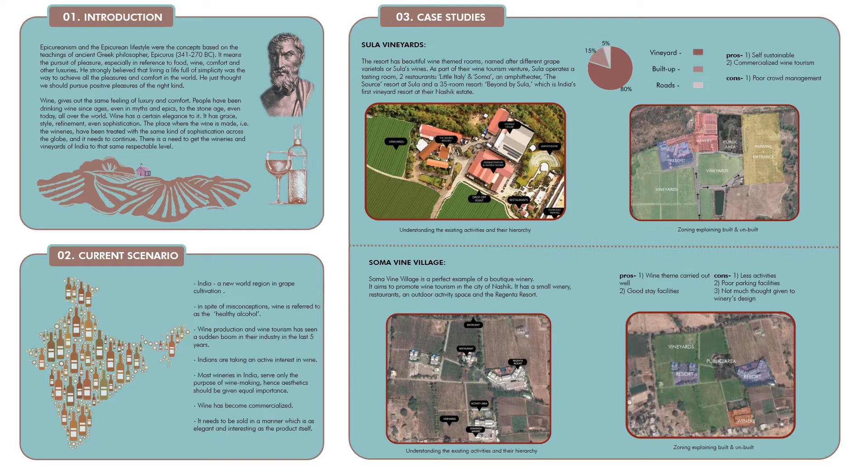A few live case studies and online case studies were done, one being Sula Vineyards, a large scale winery almost like a wine park, and the other Soma Vine Village, a smaller boutique winery. These case studies were done to understand the spaces, zoning, circulation, footfall, requirements, pros and cons.

Site selection: out of the major grape growing states in India, Maharashtra was selected, being the leading producer. The site chosen is in Sangli, at plot 50 to 59 of MIDC Palus, an already existing non-functioning winery called Krishna Wine Park.

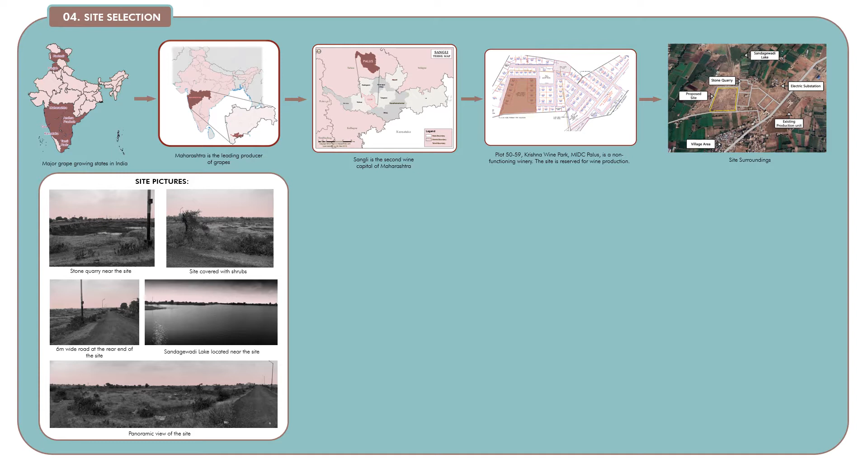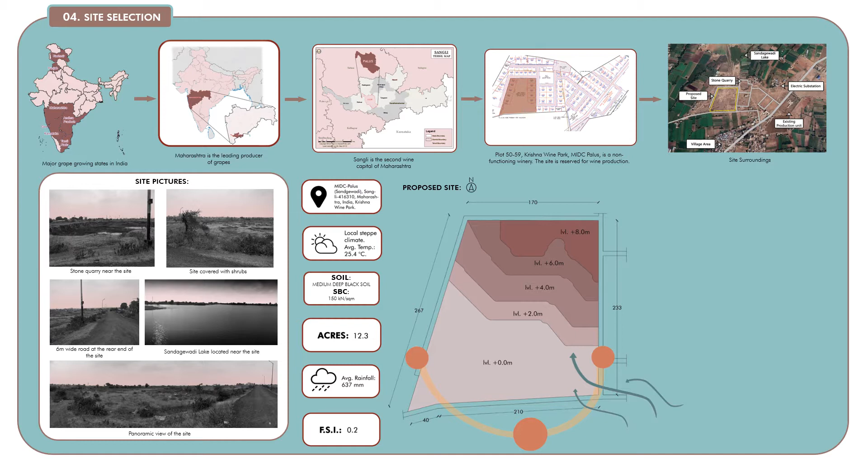These are the site surroundings, including a stone quarry, village area, existing production unit, an electrical substation, and the beautiful Sandagewadi Lake. The site chosen is 12.3 acres of land with climate ideal for growing good quality grapes. It is covered with small shrubs and bushes and has a gentle slope rising from 0 meters to 8 meters. The FSI is 0.2, giving an opportunity to create interesting open spaces and vineyards.

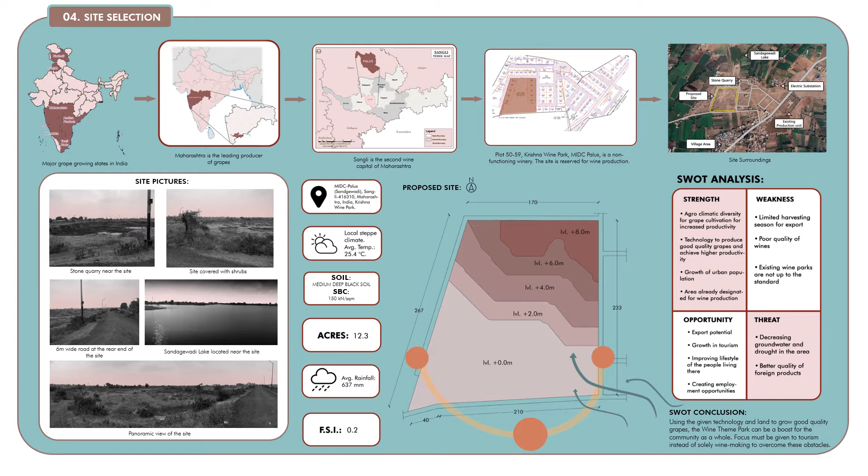The program was divided on the basis of usage of spaces by staff and visitors, where industrial facilities, that is the winery, would be a common factor.

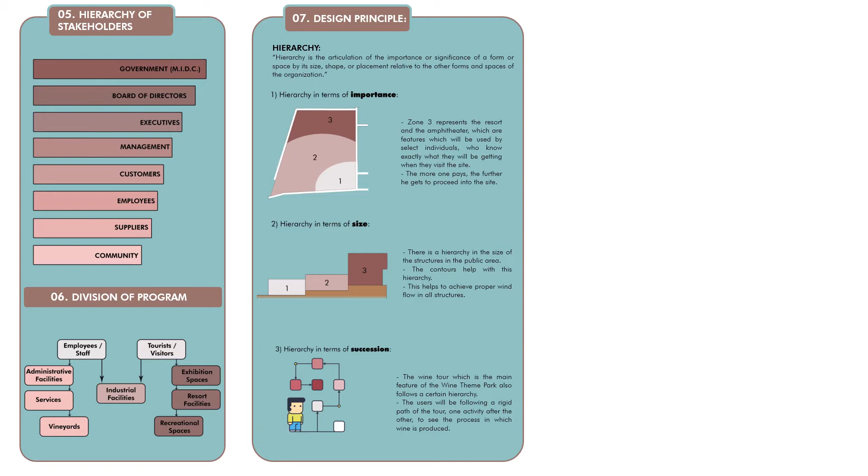The design principle selected was hierarchy, in terms of importance. In the chart showing numbers 1 to 3, 1 represents the public areas and 3 represents the resort part — the more one pays, the further they proceed into the site. There is hierarchy in the size of structures in the public area, helped by the contours, and also hierarchy in terms of succession in the wine tour, which is a rigid process, one stop after the other, showing tourists the process of winemaking.

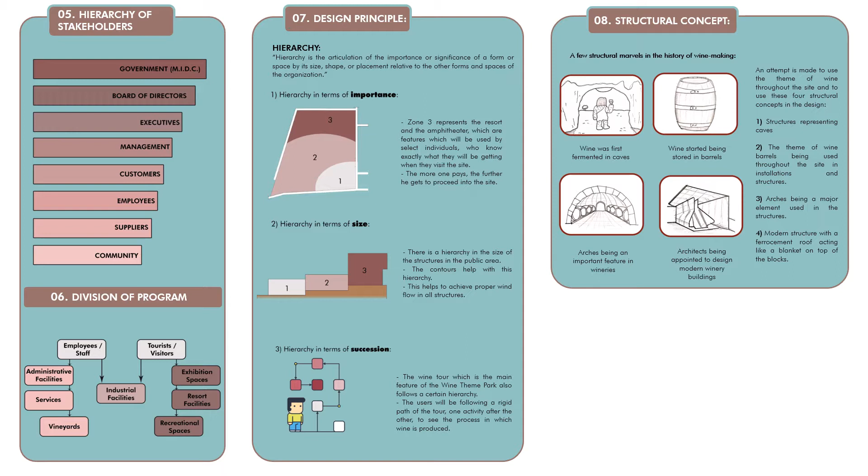The structural concept was inspired by a few structural marvels in the history of winemaking. There are structures representing caves, and the theme of wine barrels is carried forward in the site. Arches are an important element in the design, and finally the ferrocement roof of the structures represents these themes while also having a modern outlook.

How is this theme park different from a normal winery? There will be a focus on the tourism side of things. Instead of a guide explaining and showing the winemaking process in a monotonous manner, there will be an attempt to make this process more hands-on, interactive and interesting.

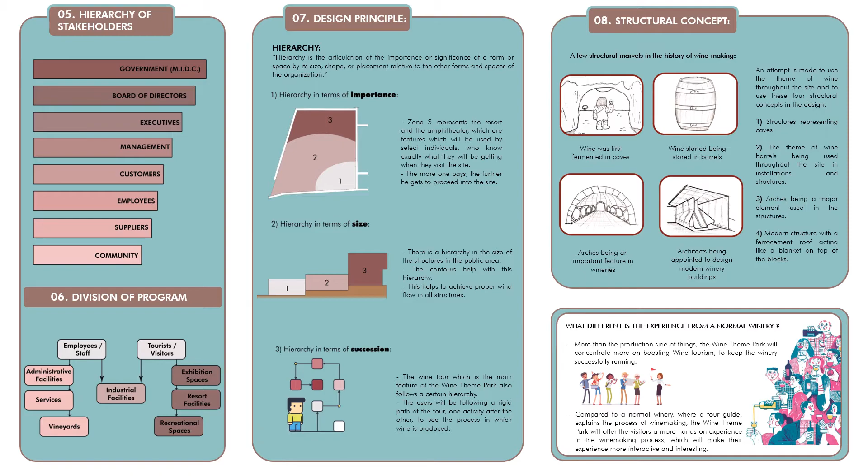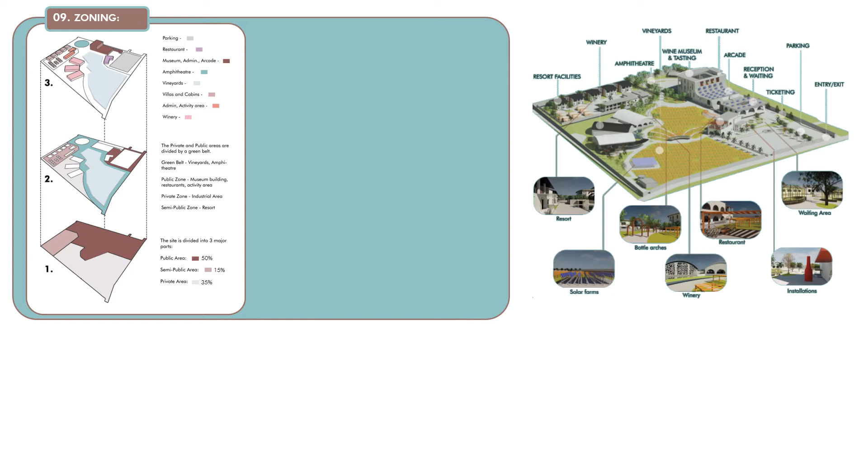The site was divided into 3 major parts: the public area, private area, and semi-public area. These areas are divided by a diagonal axis throughout the site, which is the green belt, comprising open spaces like the amphitheatre and the vineyards.

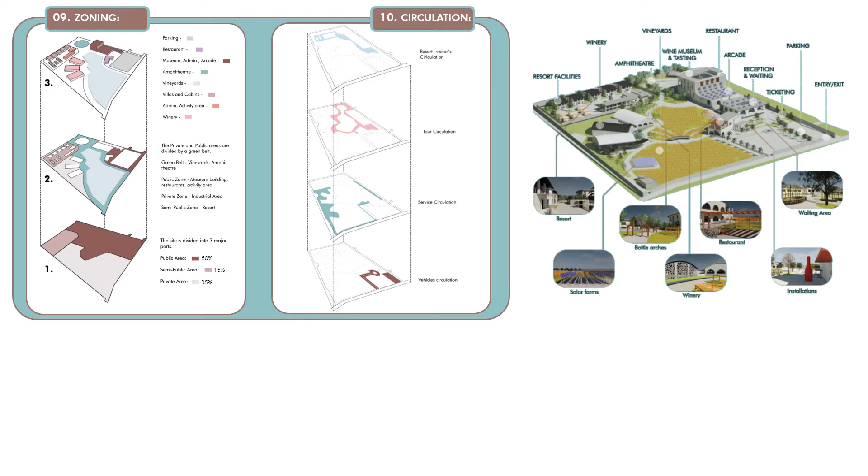Circulation: vehicular circulation was restricted to the entry of the site, and service circulation was restricted to the edges. People opting to stay at the resort will have a free flow of circulation, and finally the wine tour has a rigid circulation, which will be talked about next.

This is how the site was developed, starting with the main entry points and service entries being decided. Next, the open spaces in the green belts were planned out, then more recreational spaces were added to the site. Next, a production unit was created near the vineyards and the service areas, and finally a resort was designed at the end of the site with a view of the lake.

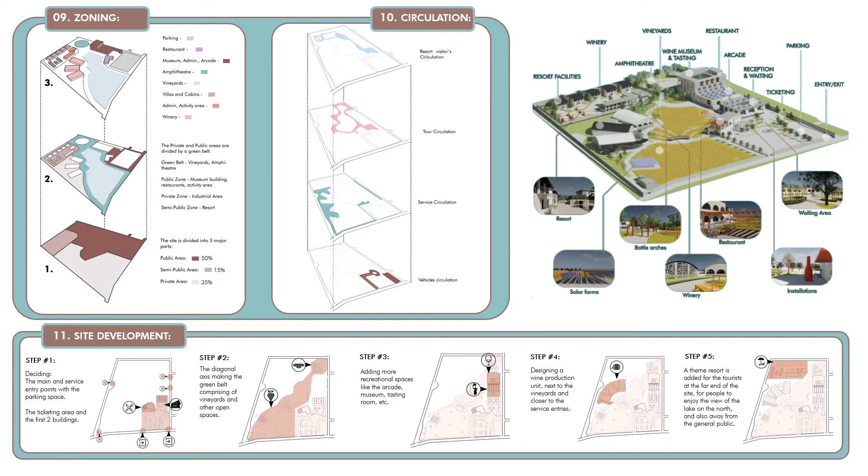This is the site plan. These are the main entry points and parking areas for the 4-wheelers, 2-wheelers and the buses and shuttles, which will take the people to the main city approximately an hour away.

These are the service entries on the left and right side. As you enter from this main gate, you will see the ticketing and waiting areas along with the restaurant building, gift shop and reception area.

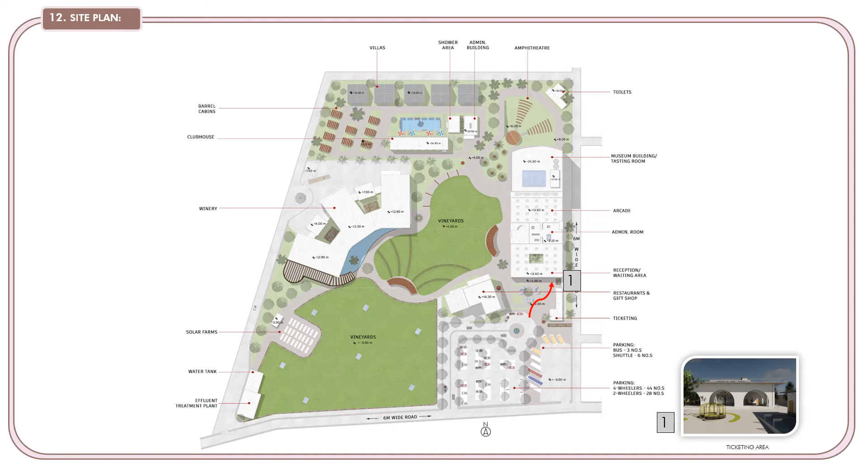After purchasing the ticket to the theme park, one can utilize it for any activity, being the restaurant, the tour or the arcade. People going to the resort will be guided to the electric cycle and caddy stand, from where they will be taken to the resort.

This is the part of the main building where the wine tour starts with the screening room. People can opt for 3 kinds of tours: the regular tour, which will be on foot; a personal tour where they will be taken on personal caddies from place to place, which older people can opt for; or a non-guided free roam tour where they can either walk or take the cycles from place to place according to their convenience.

These are the points where the cycles and caddies will be parked. After the screening room, they will be taken to the vineyards where people pick their own grapes in their respective baskets, making this process more interactive.

They will be allowed into these vineyards, whereas the other vineyards are solely for production purposes, which the tourists cannot visit. Next, they go on to the destemming and grape crushing area where they destem the grapes that they've picked. There will be pre-destemmed grapes already kept in the stomping units for them to crush.

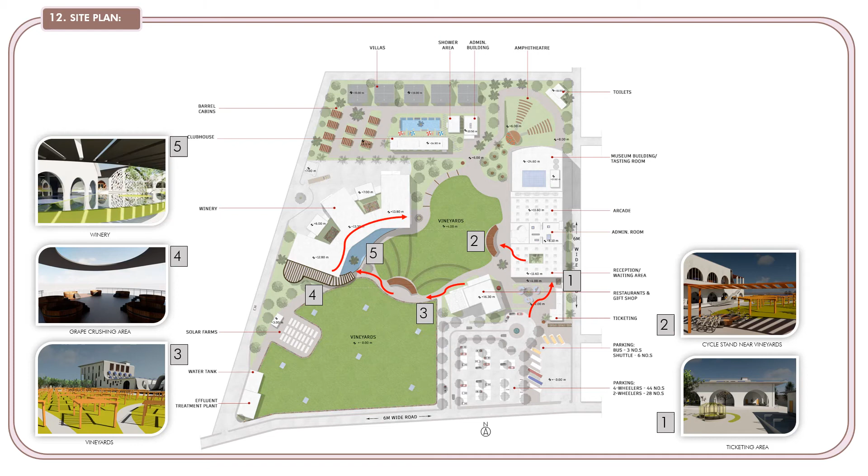Then they take a hands-on tour of the winery consisting of the production unit, barrel storage room, and labeling and bottling unit. Through the landscape features, they make their way around the amphitheater to the final step of the tour, which is the wine museum and tasting area.

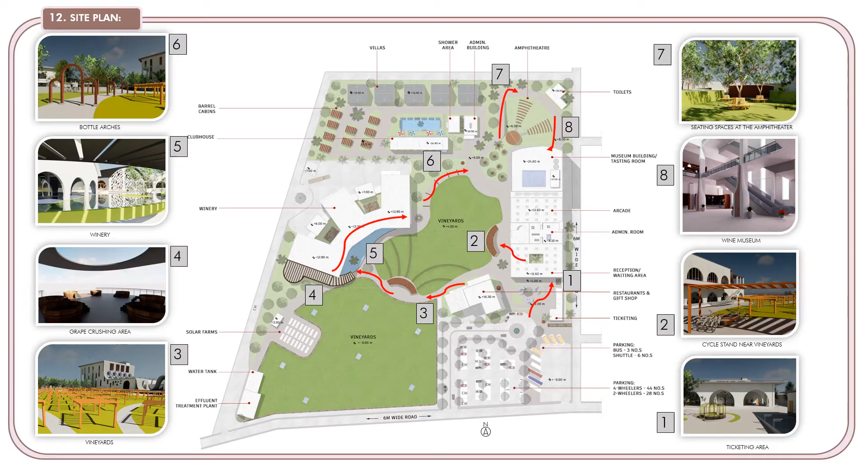These plans show the structures at the entrance of the site. After being dropped off, people will enter the site and see the ticketing counter along with the collection office. This is the front elevation of the ticketing area.

These are the outdoor waiting areas made of polycarbonate sheets. Trees are placed next to them which provide adequate shade. The gift shop is placed at the entrance so that people can visit it while entering the site or while leaving after they are done with the tour.

It has a mezzanine floor as seen in the first floor plan and provides different items like wines, other themed souvenirs or recycled wine byproducts.

The cafe on the ground floor has a bar and a kitchen. It is relatively open, providing ample air circulation, and the interiors follow a theme of wine barrels.

On the first floor, overlooking the vineyards, there is an outdoor seating area which is shaded by creepers and a pergola. Going through the ferrocement roof, there is an air-conditioned restaurant which also follows the theme of wine barrels and has smaller wine installations as well.

Here is the front elevation of the building with an installation on its left. Arches are a prominent feature in most structures in this winery. As you can see, open arches are followed on the ground floor and tinted glass arches are used for the first floor. And this is section B, which cuts through the gift shop and the restaurant building.

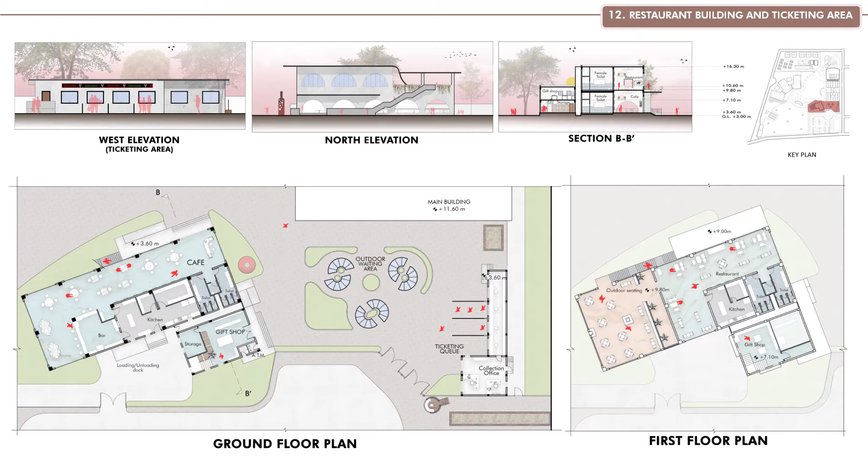These are the views showing the ticketing and the waiting areas, the ground floor of the gift shop, the cafe and the bar on the ground floor, the outdoor seating area on the first floor, and finally, the air-conditioned restaurant on the first floor with different installations.

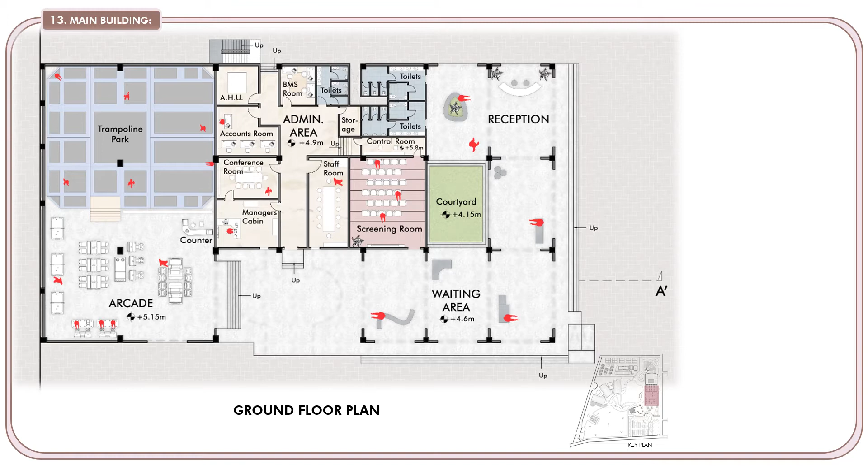Here is the part of the main building which the people can visit as they enter the site. There is an open reception and indoor waiting area for the visitors divided by concrete arches inspired from the Tama Art University by Toyo Ito. It has a courtyard and randomly shaped installations which can also be used as seating spaces.

Next to it is the screening room where the wine tour starts. Here the visitors will get a brief history of wine. Beside it is an admin block consisting of the manager's cabin, conference room, staff room, AHU, accounts room, BMS room, storage area and a control room for the screening area.

Through the roof enveloping these structures, people can go to the arcade block which has different arcade games and a trampoline park, which is mainly provided for the children that don't wish to go for the tour.

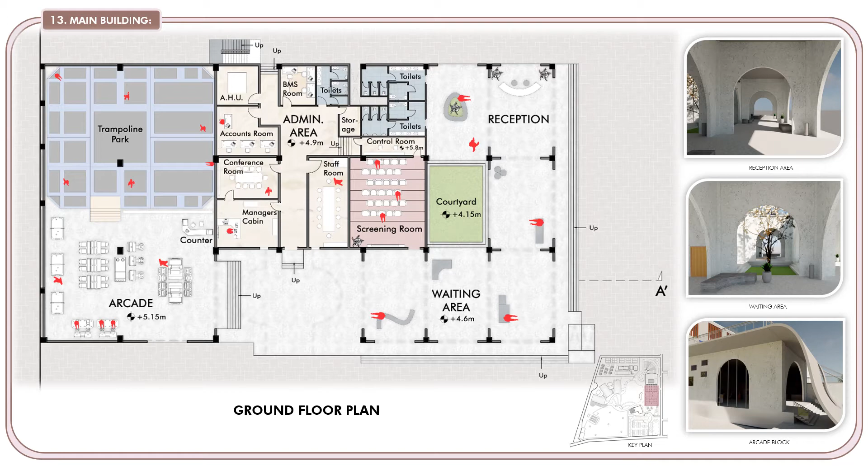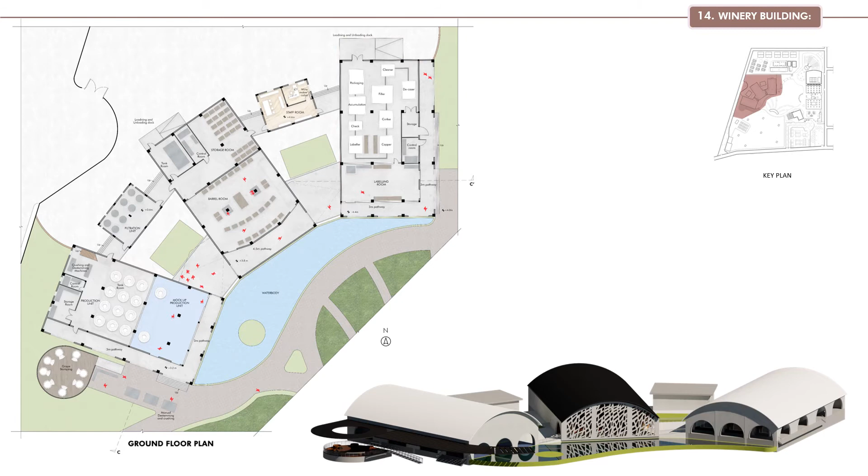These are the exterior views of the winery.

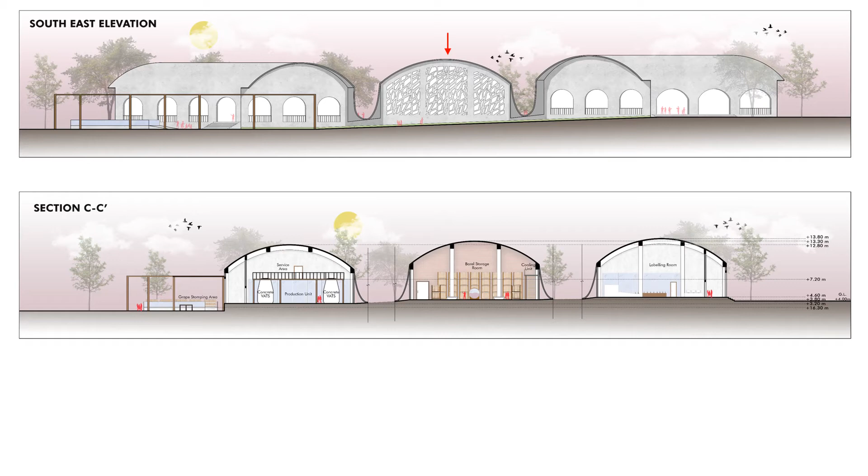The sectional views show the interiors of these three units step by step: the grape crushing or stomping area, the production unit with the vats and service area on top, the barrel storage room with minimal or dim lighting and adequate cooling for the aging process, and a huge wine barrel in the center, an exhibition piece with its side made of glass so people can see the wine inside. And finally, the labeling room.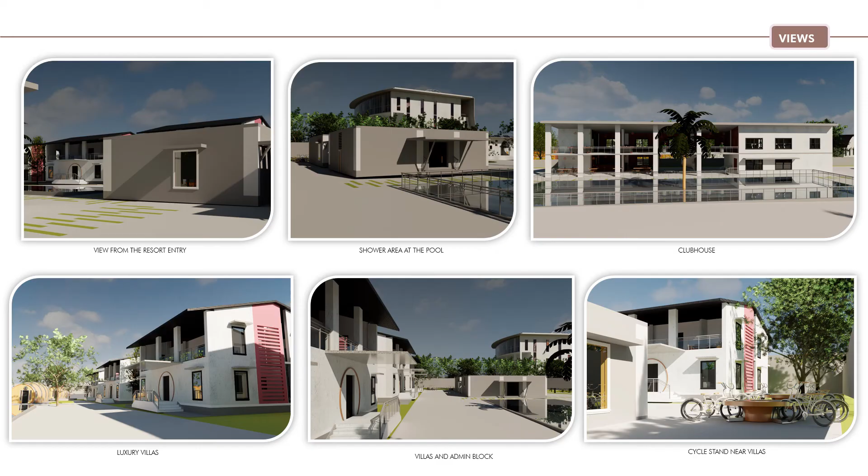These are a few views of the resort, showing areas like the view of the admin block from the entry, the shower area at the pool side, and the clubhouse. Then there are different views of the cabins and the villas with the cycle stand near them.

Now, moving on to the area part. Due to the FSI being 0.2 for all secondary activities, from the available 9,955 square meters, 9,650 square meters was consumed. The total FSI consumed, including the production unit, was 12,285 square meters.

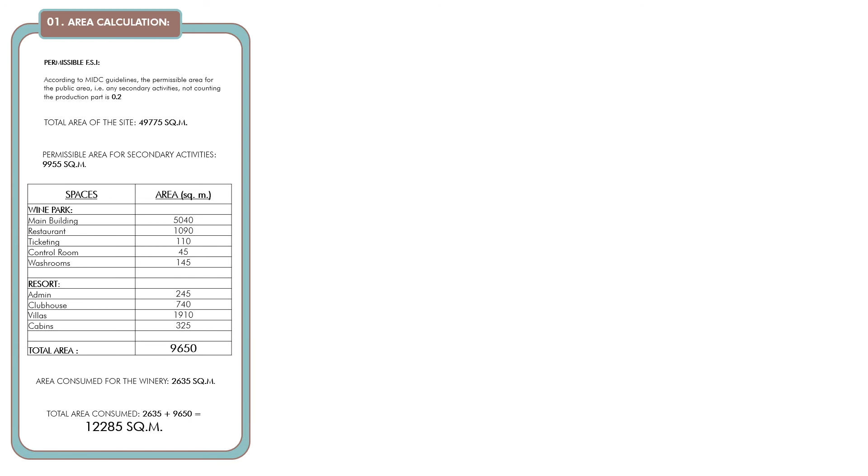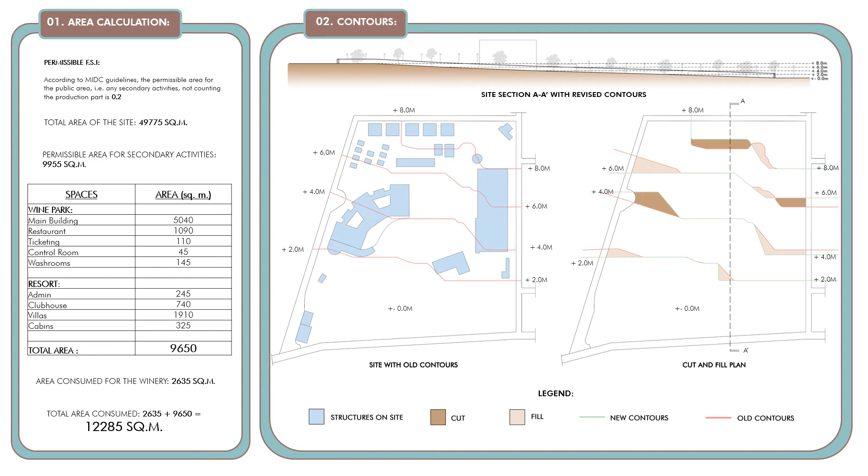As mentioned before, the site has a gentle slope from 0 to 8 meters height, each contour representing a height of 2 meters. And this second part shows how the existing contours have been slightly manipulated by cutting and filling to accommodate the structures. It also shows section AA with the revised contours.

The wine theme park will be as self-reliant and self-sustainable as possible. These are farmers' rest zones inspired from the JSC bottle seeding house in Vietnam. They are made out of plastic bottles and bamboos. The bottles will be wrapped tightly around strips of 4 cm bamboos to make the curved surface and the sloping roof. On the other flat side, there is a bamboo jali.

On the sides, 3 cm thick half bamboos are tied together with the help of dowels. Between these bamboos, there will be a 2 mm nylon envelopment which helps in avoiding dust and rainwater. And on the base, there is a 5 cm thick bamboo grid formed which is resting on the concrete pipes. These rest zones are placed in the production vineyards for the farmers when they want to take a break.

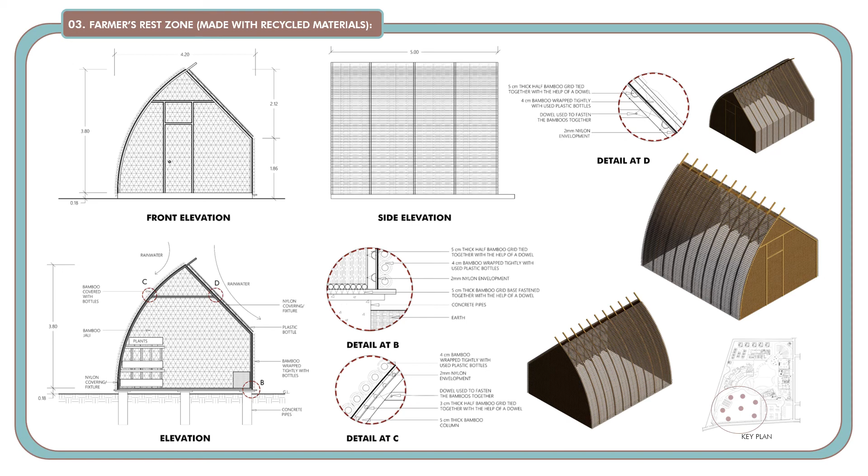Glass bottle is a major material being recycled and reused in different places throughout the project, like in the steps or the stage structure of the amphitheatre, or even used in interiors of places like the restaurant or tasting rooms as installations. Here the glass bottles are used for arches found on the way from the winery to the amphitheatre. They are 5 meters in length and 230 mm thick, resting on concrete blocks.

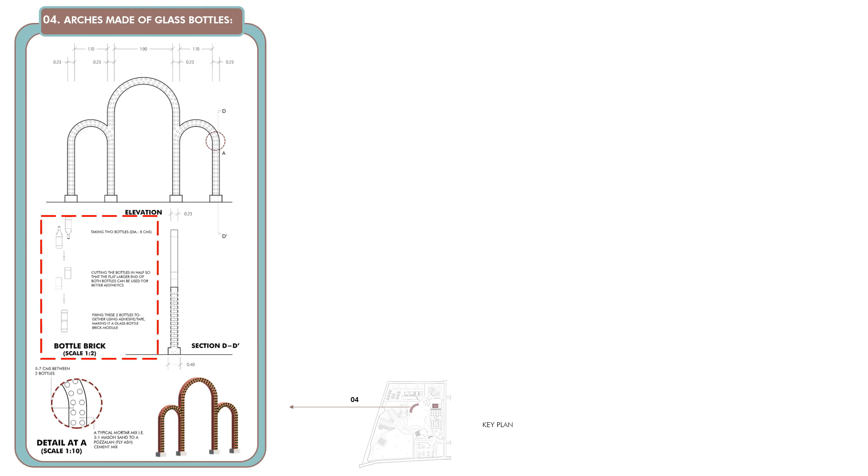This is the module of a typical bottle brick. The bottles used in these arches can be of different sizes and colors, giving an aesthetic appeal as compared to normal brick and concrete arches.

Part 5 is the fiberglass barrel vault skylight located on top of the wine museum part of the main building. It is 16.5 meters long and 12 meters wide, with glazing thickness of 12 mm. The detail at E shows how two glazings are joined with the help of an aluminium snap and pressure cap on top and a condensation gutter on the bottom.

The detail at F shows the aluminium flashing closure connected to the vertical and horizontal glazing. The detail at G shows the connection of the skylight to the base with an aluminium plate and an anchor. The detail at H is similar to the one at E, but instead of having the condensation gutter below, it has an aluminium snap bottom.

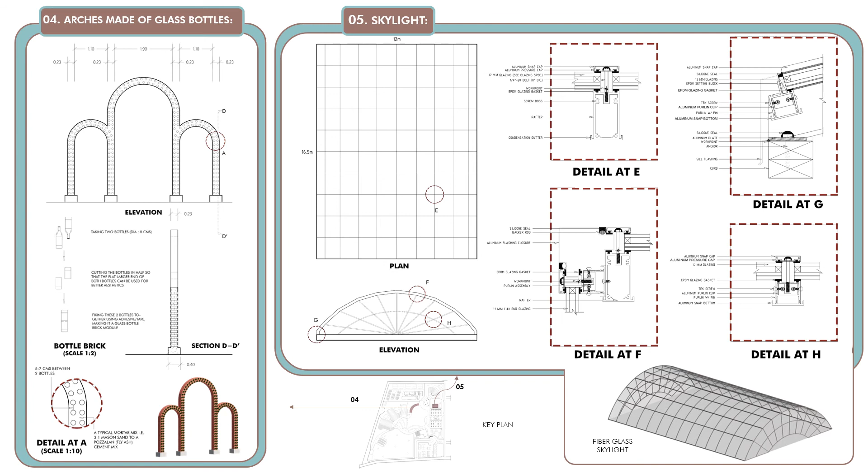Section EE is cutting through the production unit of the winery, which has a barrel vaulted roof. This is the view of the production unit, showing the service area on top, which staff will use regularly to clean the concrete fermentation vats inside out.

As seen in the plan, there are slits present on the floor that collect the water used. This water is collected in the storage tank behind and is further transferred to the effluent treatment plant.

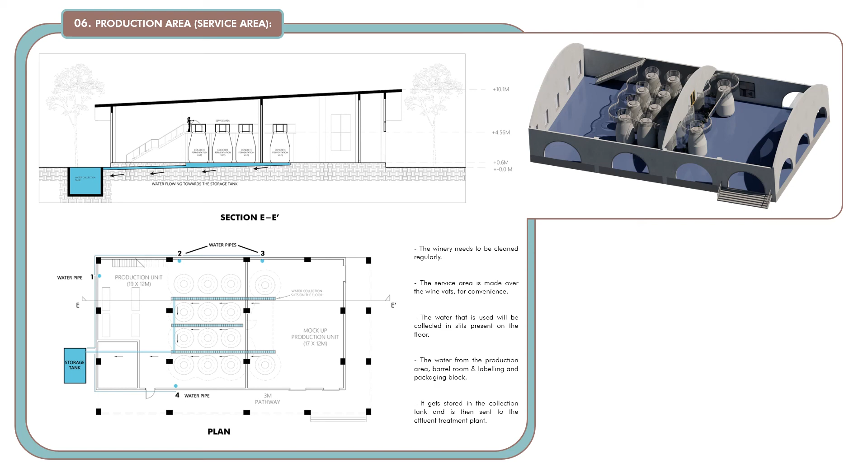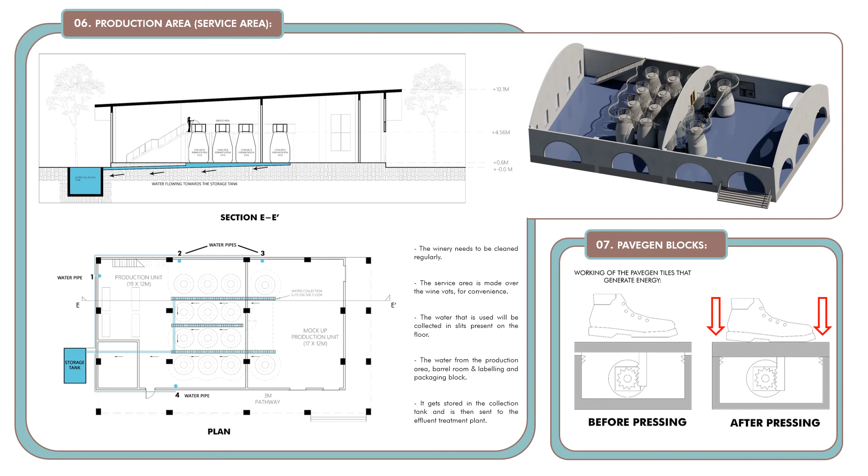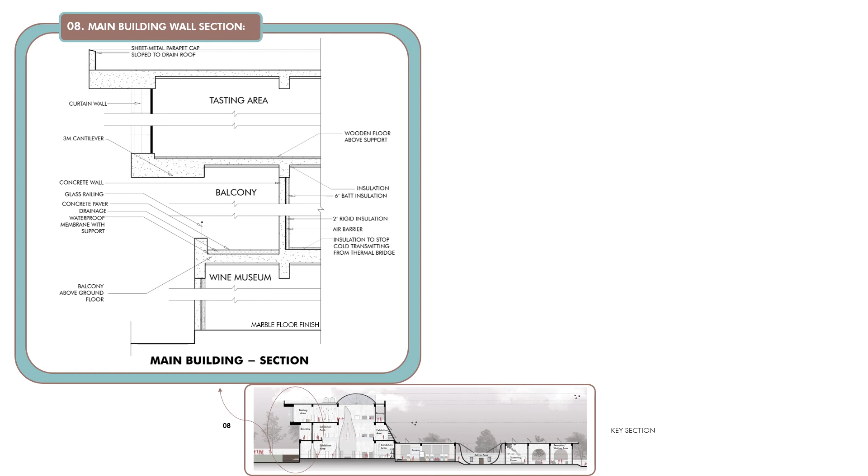On the other side of the building, there is a balcony shaded by large vertical rotating louvers. Each louver is 310 mm wide and 40 mm thick. They are supported by mullions which move with the help of an actuator located on an actuator bracket. There are 4 large openings on the wall for these louvers, each 2.8 meters long and 2.65 meters in height.

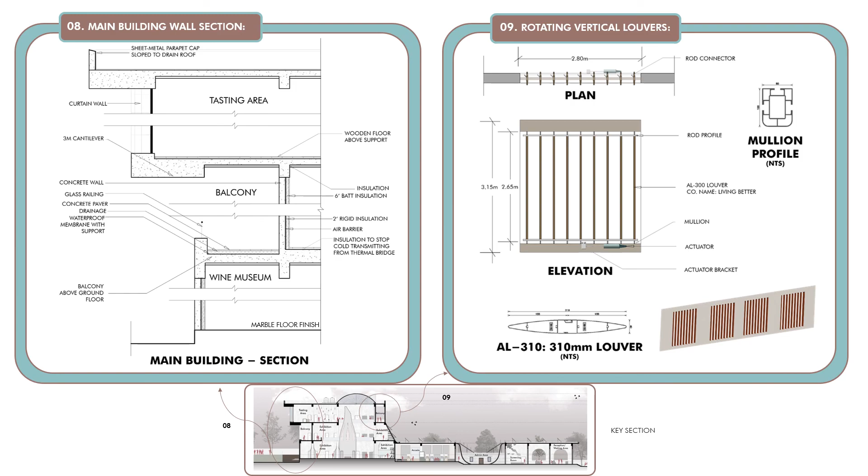The final slide shows the services layout of the site. The inspection chambers are placed at a distance of 10 to 20 meters according to requirements on the periphery of the site. The water exits the site through the disconnecting chamber located at the bottom left part of the site and exits to the main sewer line on the main road.

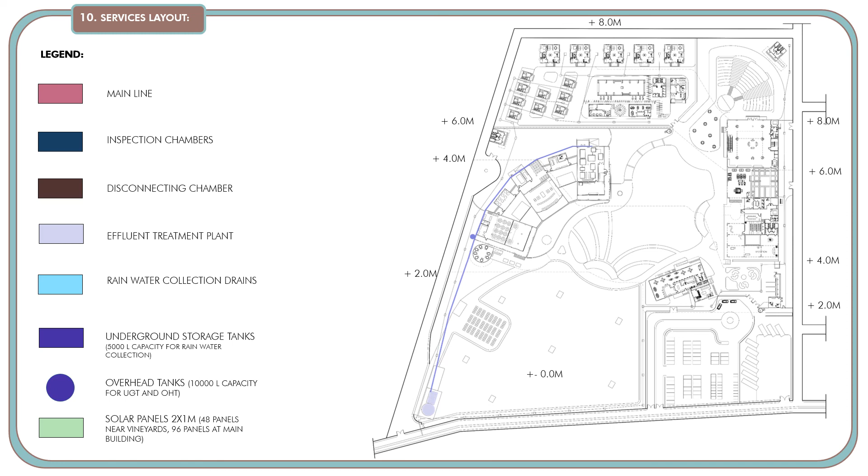As mentioned before, the winery wastewater gets collected and sent to the effluent treatment plant. There are drains at the edges of the pathways which collect rainwater and send it to the storage tank next to the treatment plant. These drains slope downward with the site contours.

This water from the ETP and the rainwater tank will be treated and can be reused in the wineries and vineyards. Drip irrigation is also used in the vineyards.

The approximate footfall, including staff and visitors, would be 300 people per day, who would require approximately 50 liters of water per day. Hence, the tank capacity is taken as 10000 liters for OHT, 10000 liters for UGT, and 5000 liters for the rainwater tank.

The UGT is located at the topmost part of the site for ease in the flow of water. There are OHTs located on top of the main building and even in the admin office of the resort.

There are 96 solar panels of size 2 meters by 1 meter located on top of the roof of the main building generating energy, and 48 panels located near the vineyards which are used for providing hot water to the wineries and are also used for solar water irrigation.

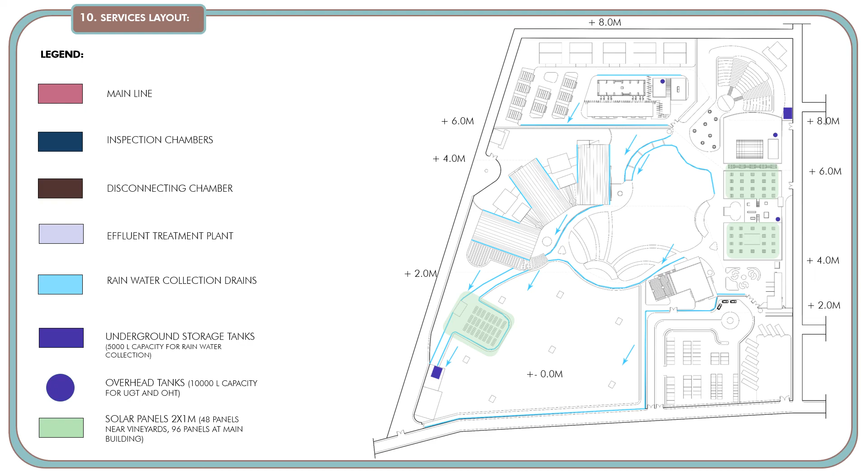And that brings the end to this thesis project. Thank you.